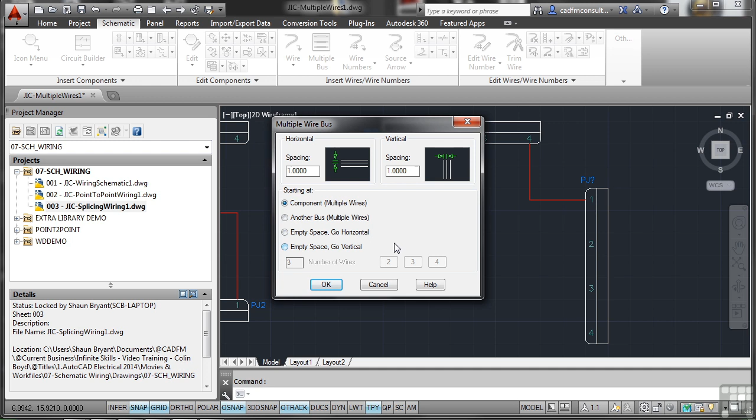Now I've got to look at the spacing here. I'm going to set the spacing up so that it's 1 inch by 1 inch, like so. I'm going to go for component multiple wires, and I can also go for another bus or an empty space vertical. So I can do horizontal or vertical there. The reason being is I might just be setting up wiring without connectors at this particular point.

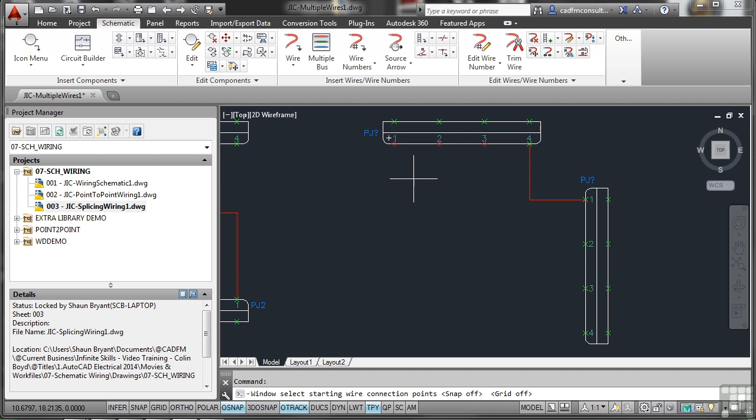So if I click on OK now, what it's prompting me to do is window select starting wire connection point. So you'll notice the connector points are now highlighted with their little green stars. Now you'll notice I've got snap and grid on. It's sometimes easier to do a crossing selection window without them on. So I'll now click and I'll drag across those points there and click for the second part of the window there. You can see the connections highlight. So 1, 2 and 3 are now highlighted with those little red circles.

I now right click to confirm that, and now it will prompt me to select the points where I've got to go to. And as you can see, look, I'm moving now. I can go this way, and the arrows highlight the directions of the wires. So can you see that there? Look, if I come down vertically, I can go left or right as well. So I'm going to come down here, and I'm going to select a point where I want to go to. So you'll notice that goes straight to those connector points there on that bus there. So I click, and it puts the wires in for me.

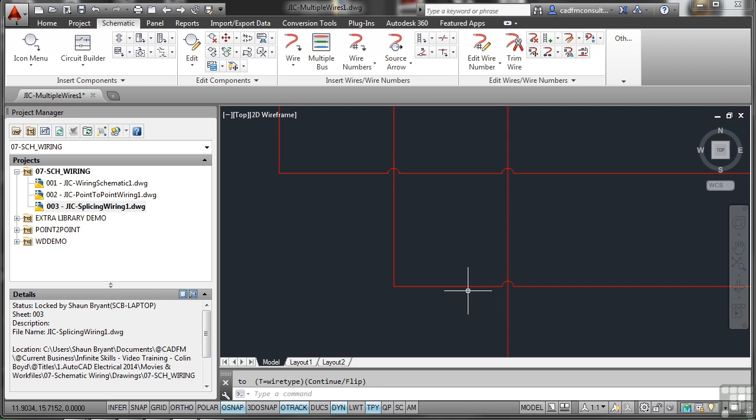The lovely thing about that, all the hoops are put in as well, so that all the wires are clear and where they're going. Now the lovely thing about that is they are just wires. They're multiple wires, but they're just wires, just like placing a single wire. So the trick is there, I could then, if I want to, perhaps go to the icon menu and perhaps put a splice in. So there's my recently used splice. So I might pop a splice, say, there.

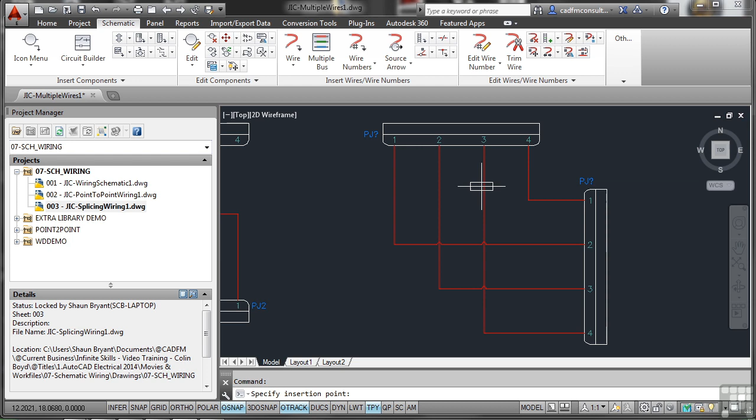So I make sure I don't snap, so let's take object snap off. And I'll just click there. Now I'm not going to worry about a component tag, I'm just going to OK that for the moment. And you'll see my splice there. Now the nice thing about that is I can now take wires from that splice. So I do a single wire and take it from the O-snap, which I need to switch back on. So I go nearest there, zoom in a bit, nearest.

That wire now comes off of there. And what I can do is I can take that maybe to there, like so, and click. And that takes that to the nearest one, which is number 1. Press enter, so I've got another wire going across. But you can see how clever the multiple wire setting is. Now I don't have to have connectors. As I said, I can just put wires into space, both horizontally and vertically as well.

But that multiple wires, as you can see, it's another time-saving exercise. It saves you having to draw multiple wires that are regularly spaced. Now obviously you can utilize snap and grid to do that as well, but you can specify the spacings horizontally and vertically between the wires, which makes your life really easy. It saves time, it's professional, it's quick, it's clean, but most importantly, it's accurate. So make sure that you use your multiple wires in AutoCAD Electrical.

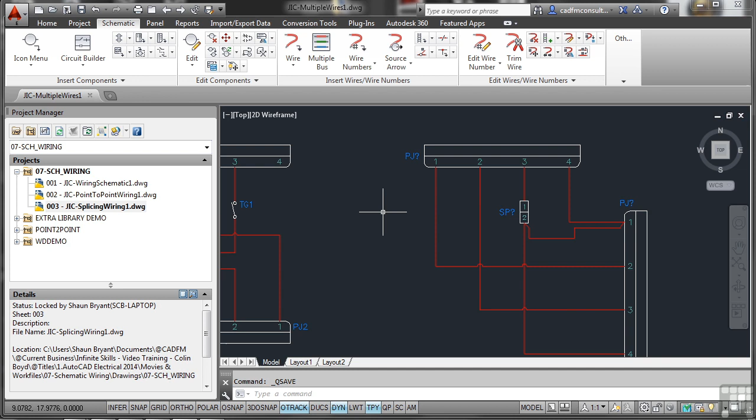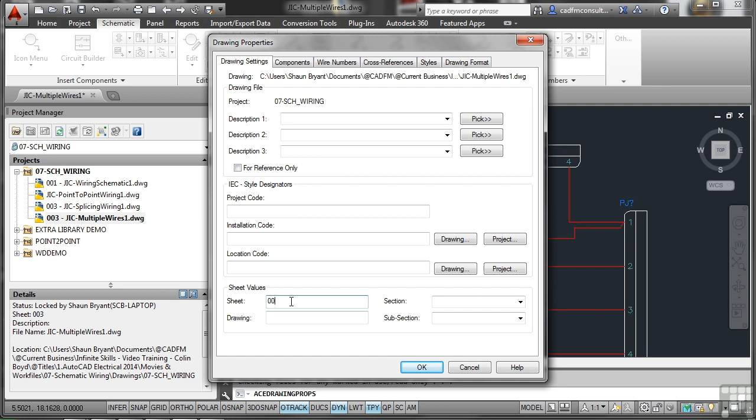Now, something we didn't do. Make sure that we save our drawing with what we've done, but also, more importantly, add your active drawing to your project. So it's a right click, add active drawing, yes to the default values of the project, and you'll see that multiple wires has got sheet 003 because I copied the previous drawing. So I'll right click there, go to properties, make sure you change the sheet number as well so it's all neat and tidy. And again, get into the habit of changing this.

It's so important to add your drawings to your project as you go, because you can so easily create a massive load of drawings in a folder and not know which project they're associated with. File management. Make sure that you add your project to whatever you're doing, but more importantly, add the drawings to the drawing list in the project as well.